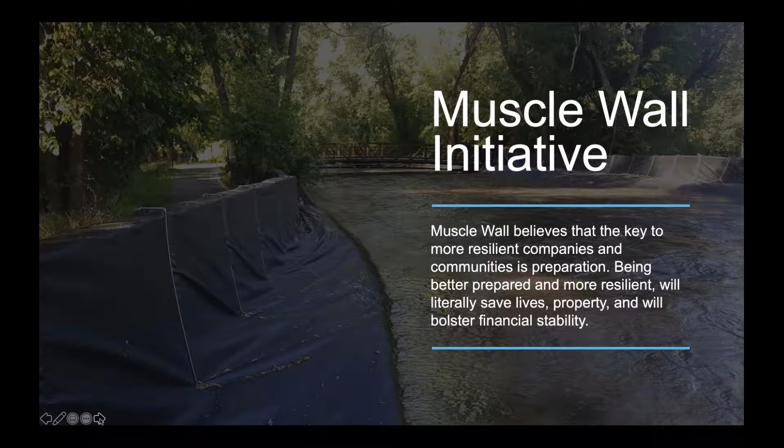FEMA has stated very clearly that for every $1 spent on preparation, you will save at least $6 on reparation. And so that's something that we focus on, and Muscle Wall is designed to be part of the front side of those types of risks. This is part of our initiative and part of our mission statement. I'm going to go ahead and share with you an overview video to get started.

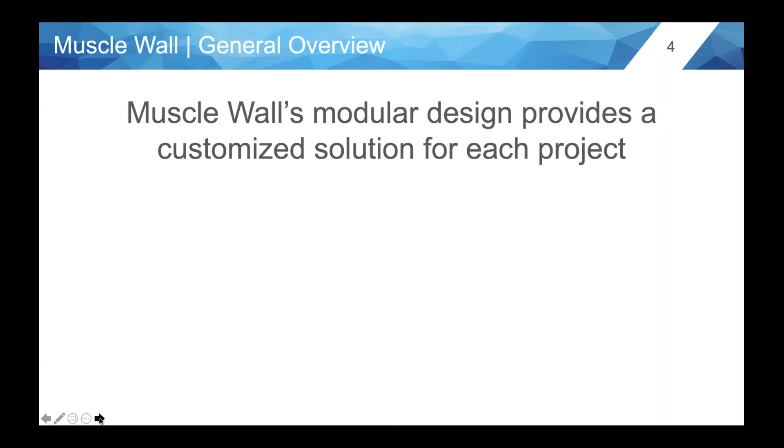It's a great video that gives us a nice snapshot of some of the many applications where the Muscle Wall system has successfully engaged different applications. This slide really well identifies the modularity of the Muscle Wall system. As you observed this slide, you could see the Muscle Wall sliding into place, identifying one of the components of the Muscle Wall system, which is a sliding joint.

That sliding joint allows the Muscle Wall to jump over obstructions and deal with different types of rolling and undulating terrain. What you actually won't notice at the joint is there's some flexibility at the joint. There's a 22-degree flex of the joint, which allows for all types of meandering around obstructions and dealing with different dynamics in different applications.

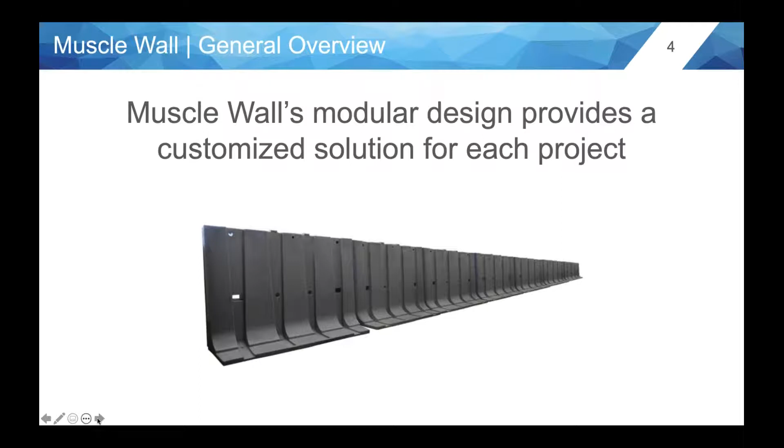down towards the toe. What you don't see in this slide is that we would use some type of a covering, depending on the application. If it's a flood protection or flood management scenario, we would use some type of an impermeable membrane or liner. If we're dealing with a stormwater application, we'll generally use some type of a geotextile.

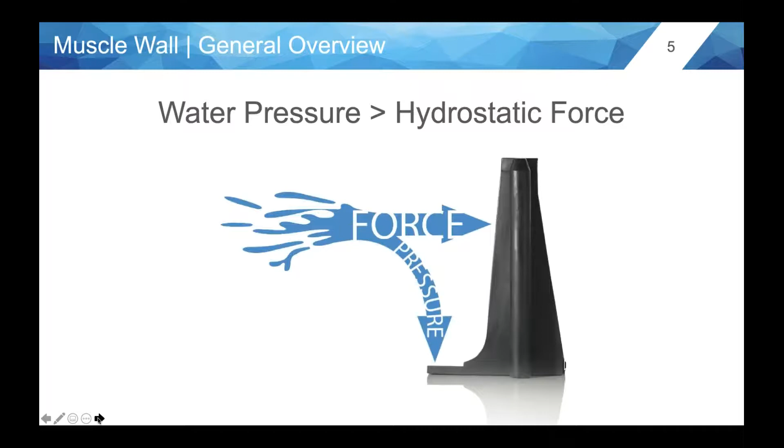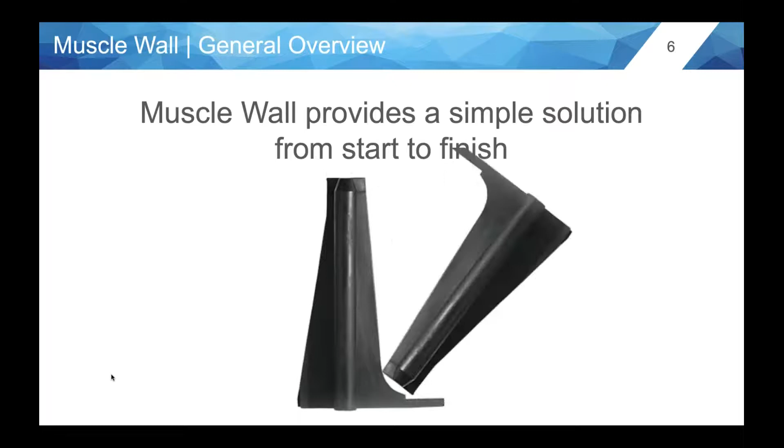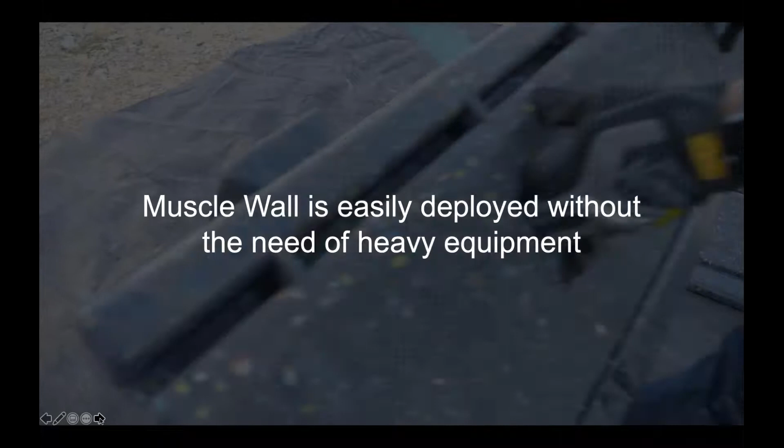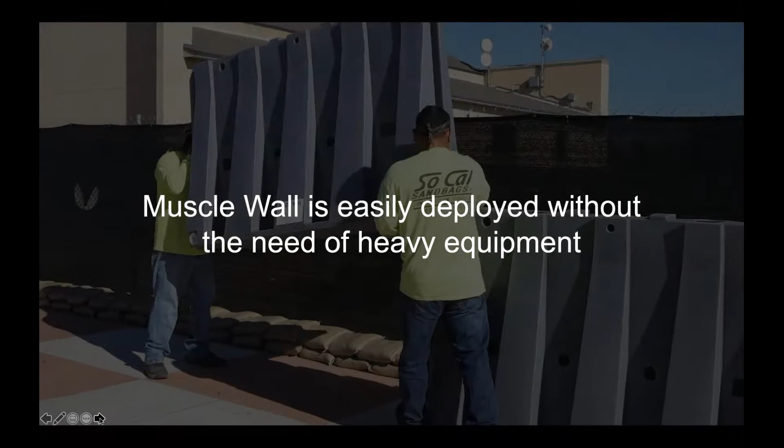We recognized early on in the design of our system, as we focused primarily in the beginning on flood protection, that as much as heavy equipment would speed up the process, we knew that all of our systems would need to be deployed by manpower alone. So all of our systems, once they're on location, can be fully and completely deployed by manpower alone.

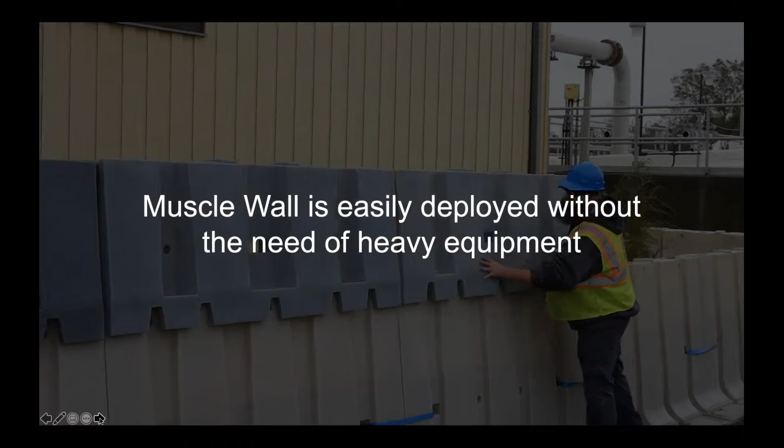This slide and video represents some of our very early testing that we did in the very beginning and the inception of Muscle Wall. These tests were done at and in conjunction with the Utah State University Water Lab, which is an Army Corps approved water lab.

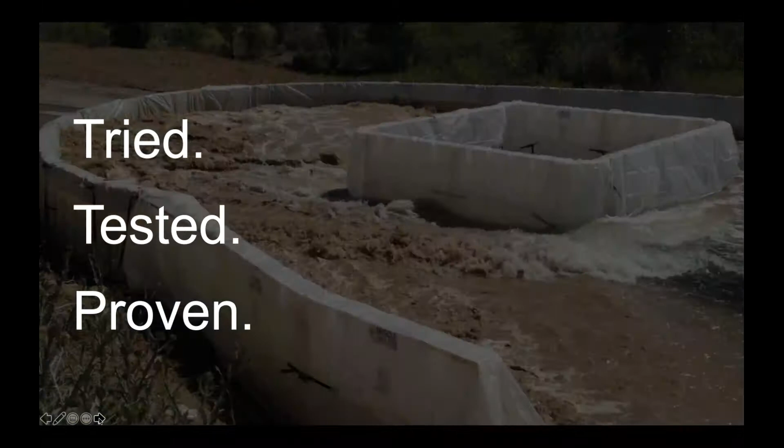We've also been tested and proven in real world applications, and recently went through the industry standard for flood protection test, which is done with the Army Corps, FM Approval, and ASFPM. And this video that I'll be showing now is footage from the completion and the success of that recent test.

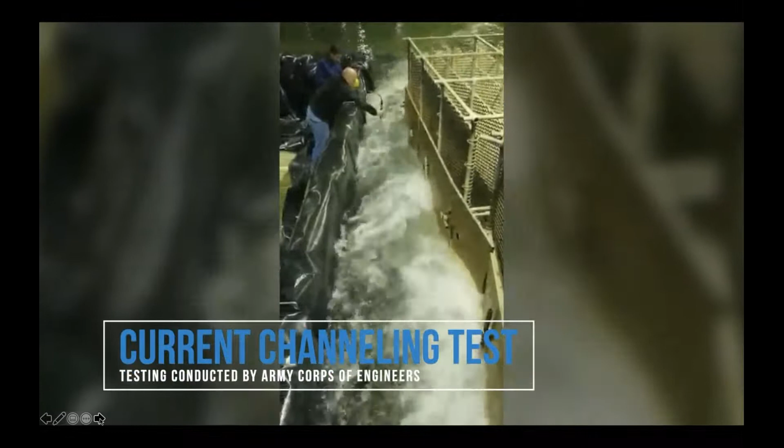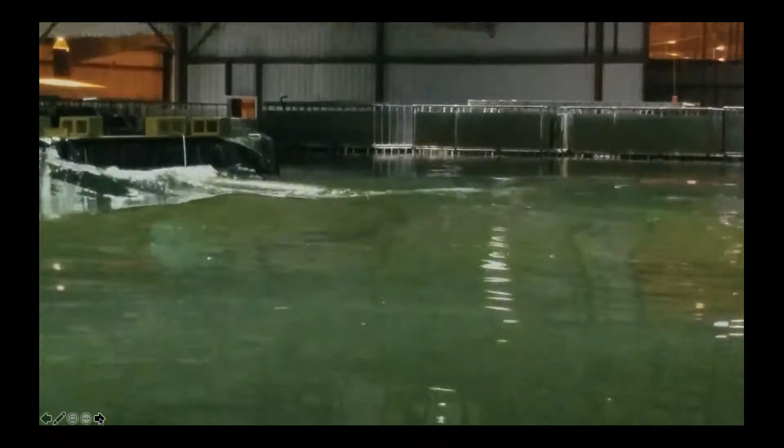We take a great deal of pride in the results of that test that we recently completed, even though we have done these tests over the years to continually test the abilities and the success of the system. That certainly was a big deal for us, so we take a great deal of pride in that.

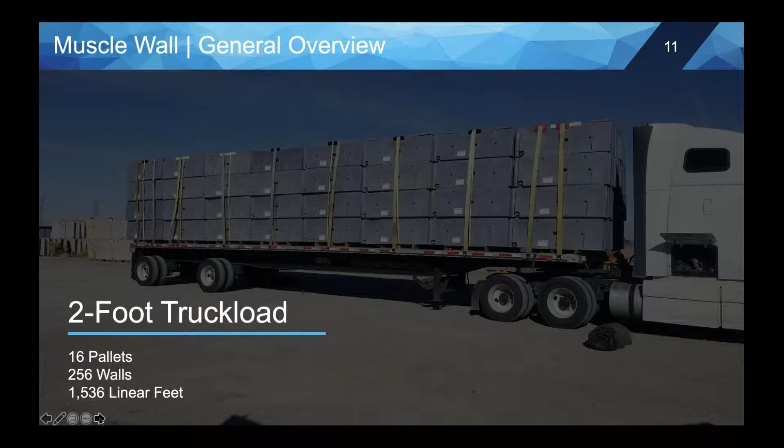There's always going to be some type of a conversation at some point about logistics, transportation, cost, and so forth. And so the next several slides, I'm going to show you some pictures of the Muscle Wall on full loads of transportation. This is a full load of our 2-foot product. That's 1,536 linear feet or 256 units. That's going to be about $50 per linear foot, or just over $80,000.

This is our 3-foot Muscle Wall truckload, 192 walls, 1,152 linear feet, around $75 per linear foot. It's going to be just north of about $85,000. And then this is a full truckload of our 4-foot product, 576 linear feet, about $100 per linear foot, or just over $60,000. Keep in mind, these are full truckloads.

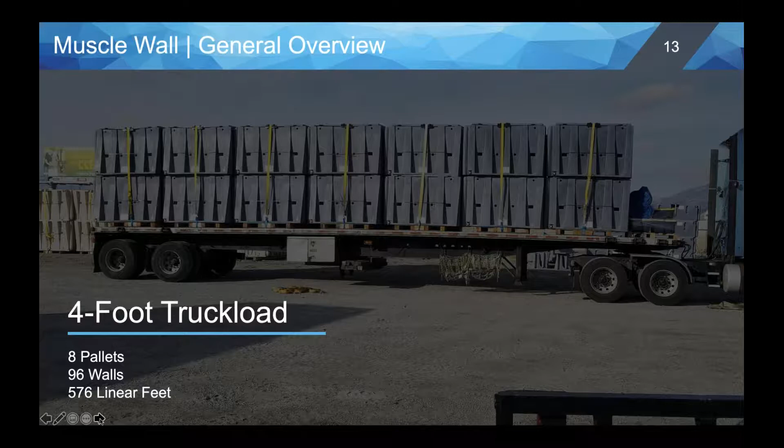Obviously, with different applications and needs for customers, we would design truckloads or multiple truckloads to meet the individual needs of each customer and application. This just kind of gives you a snapshot of the different sizes, linear footage, cost, and so forth.

I like to share this slide for multiple reasons. This is actually an application where the customer needed some type of a washout space to protect against environmental risks. And so it definitely is something that we used in a live application. It also exemplifies some of the other components and important design pieces of the Muscle Wall systems.

These are multiple systems being connected, and not only in this particular application, but we've had other applications where we needed to utilize different heights of Muscle Wall to successfully engage the dynamics of an application. So what you see here in the front is our 6-inch drive over, which allows for equipment and vehicles to drive into this space. Then you see the 2, the 3, the 4, and the 6-foot Muscle Wall, all interconnected.

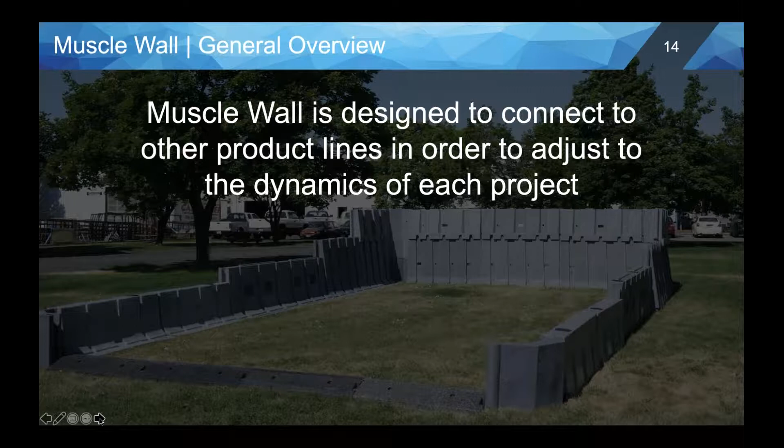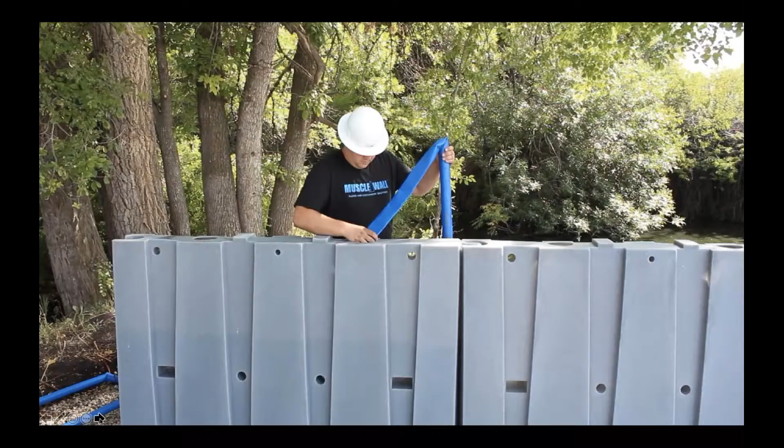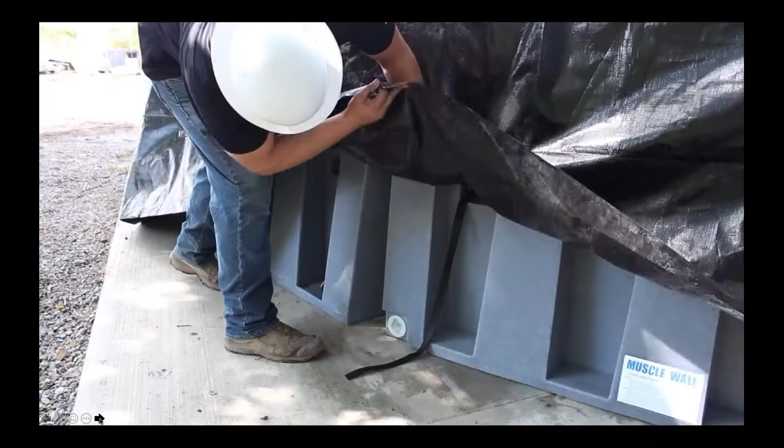With the 4-foot Muscle Wall, 2 straps are going to be used, one through the middle of the wall and one at the top. At this time, only secure the middle strap on the 4-foot wall. The liner is then deployed over the Muscle Wall system. On the back side of the system, cut a small horizontal slit in the liner. Pull the non-ratcheted strap through the slits and then tightly secure them down.

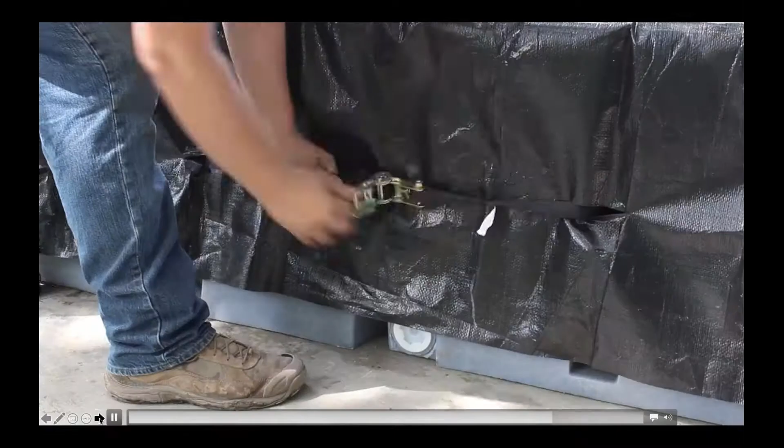As you can see from that video, Muscle Wall is a very simple system to deploy. There's a couple of components in that video that are important to note. Obviously the liner is important. Depending on the type of application, we would use a different type of liner to deal with the dynamics and the risks of each application.

Also, the 2, 3, and 4-foot Muscle Walls are hollow, so we do fill them with water. And those are some important things to consider and to certainly be aware of. We're going to jump into some of the very specific applications that we have engaged successfully and focus on. The 3 areas that we'll be focusing on primarily for the rest of the presentation are going to be flood control, containment, and then stormwater erosion control. So this next video focuses on the flood protection projects, the flood control projects that we've worked on.

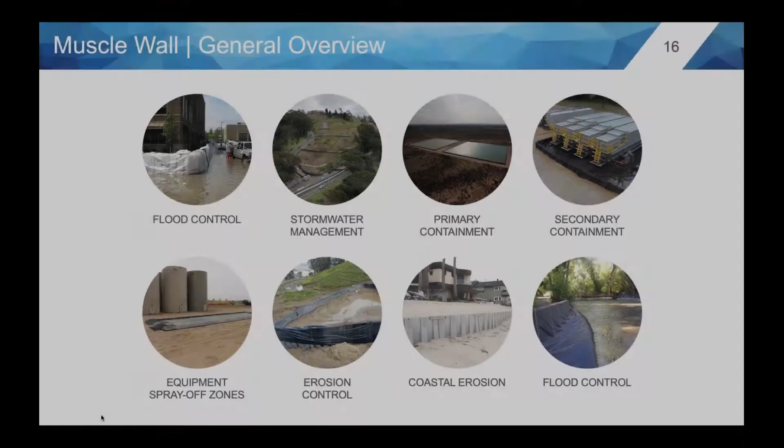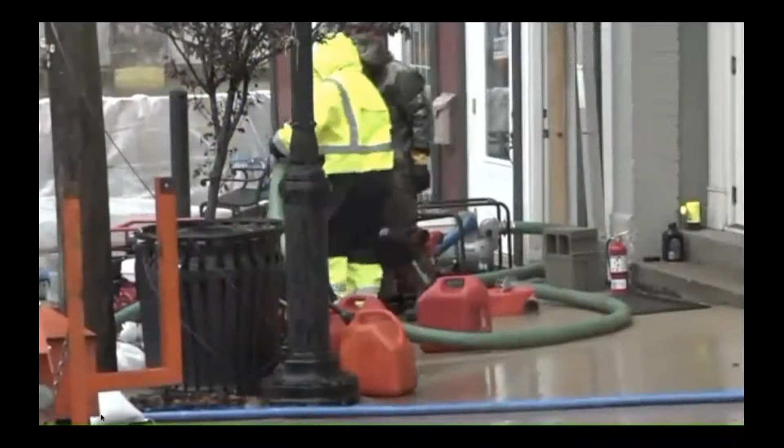Alton is used to dealing with floodwaters, but this year the mayor tells me they're implementing a new system to try to help protect the town. Now the mayor says it's really being put to the test since they didn't expect waters to crest quite so high. What started off as maybe a moderate to a minor flood, we are now in a major flood category with a crest in the city of Alton of 35 feet. Mayor Brant Walker says that's 16 feet higher than normal, putting a lot of pressure on the new Muscle Wall. Mayor Walker says it also takes less time to set up and less manpower to maintain, ultimately costing less tax dollars while still protecting the downtown.

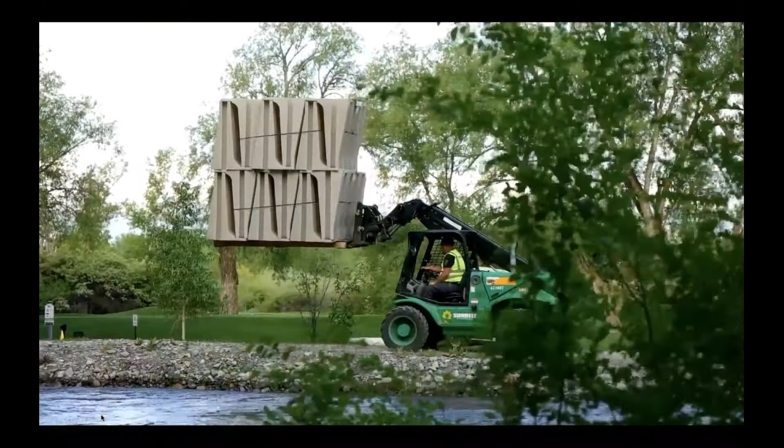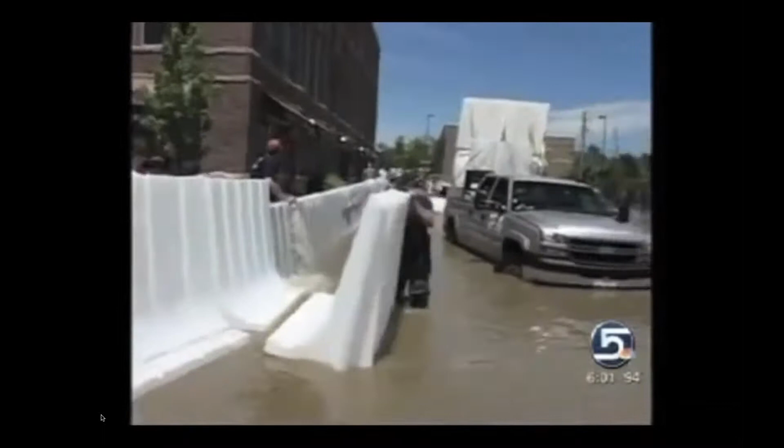Floodwaters puddled out onto State Street. A 3-story building was right in the middle of it. Sandbaggers fighting a losing battle with floodwater. We were right there on the edge. I mean, it was inches from entering the first floor. To the rescue, Muscle Wall. Their invention can be floated into place, filled with water, and sunk. The barrier quickly surrounded the building and eliminated the need for thousands of sandbags. The whole wall was built within 2 hours. If it weren't for Muscle Wall, there's no way we would have saved the building.

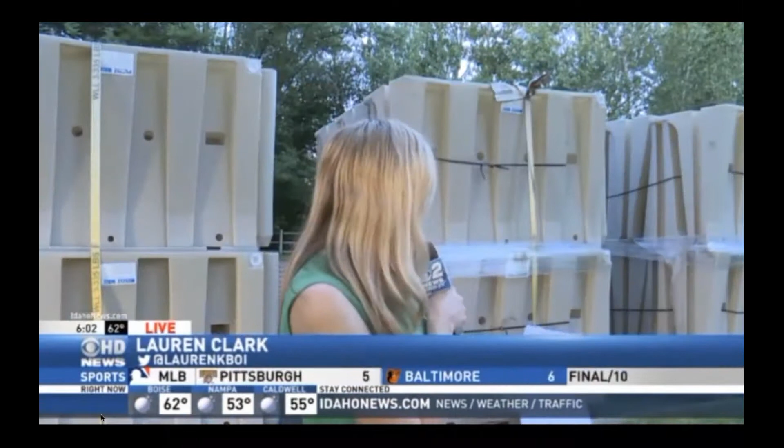This morning, Julia Davis Drive is closed. That's in preparation for a wall to be built around the zoo. KBOI 2's Lauren Clark tells us why zoo staffers are now seriously concerned about flooding and why the city chose a wall over other options. Kelsey and Brian, you guys can notice these materials here behind me used to build that Muscle Wall. If the zoo does have to evacuate those 200 plus animals, they would only have about 24 hours to make all of them move. And that is a logistical nightmare.

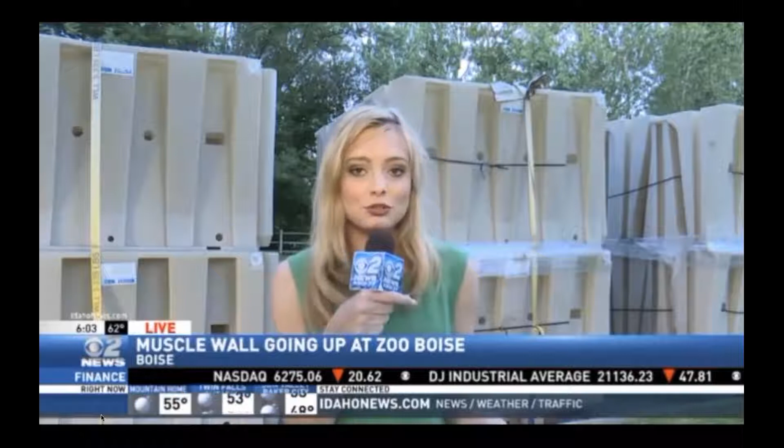Moving 200 animals would not only be costly, potentially more than $500,000, it would also be difficult. The animals could be stressed during the move. That's why the city says a Muscle Wall is a very worthwhile investment. I think it would be a more prudent, reasonable task to just go ahead and put in the Muscle Wall system now and hope that it's actually for nothing. This wall will only take about 1 to 2 days to be completed, but it will stay until flooding is no longer an issue.

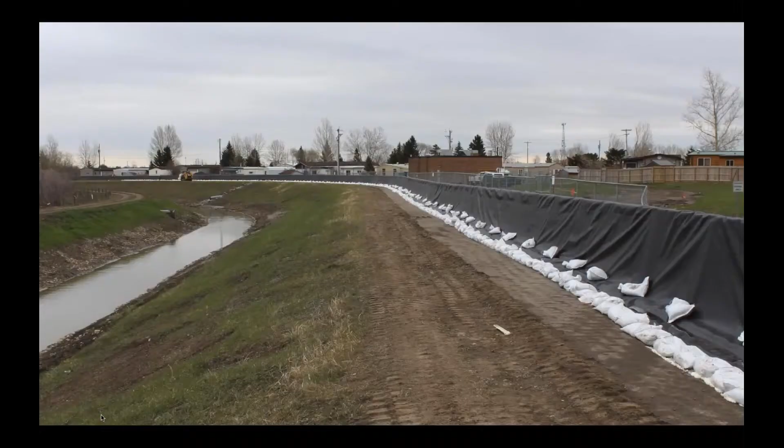That video does a very nice job at focusing on a lot of diverse scenarios, but primarily really well defining critical infrastructure. So as you could tell in the video, you saw utility substations, you saw different communities, and in one case we showed the zoo, actually in Boise, Idaho. And I always kind of get a little bit of a chuckle out of this. One of our customers in Canada focused on protecting the hockey rink versus the city hall. So the hockey rink was more important. So ultimately, critical infrastructure can be defined in so many different ways. But I think the most important thing is whatever that might be, we have successfully engaged those important issues and risks.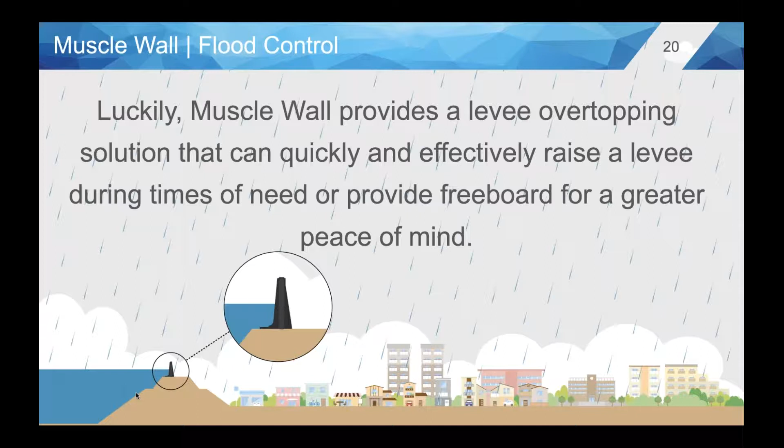So ultimately, what we're talking about here is temporary flood protection. Sandbags, on their very, very best day, are a temporary flood protection. So as a comparison, this is also in conjunction with the video that we saw just a moment ago, where the gentleman said if it wasn't for Muscle Wall, we would have lost the building. That particular building had 600 linear feet of protection need. They needed 4-foot high protection, and so we engaged the 4-foot Muscle Wall in that particular application.

If they were going to successfully engage this 4-foot high sandbag wall, it would have taken them 2 to 3 days to effectively do that, and well over 100 laborers to do that. We were able to successfully engage the Muscle Wall, 600 linear feet of the 4-foot Muscle Wall, with 8 individuals in less than 2 hours. And just as the individual explained, if it wasn't for Muscle Wall, they would have lost the building.

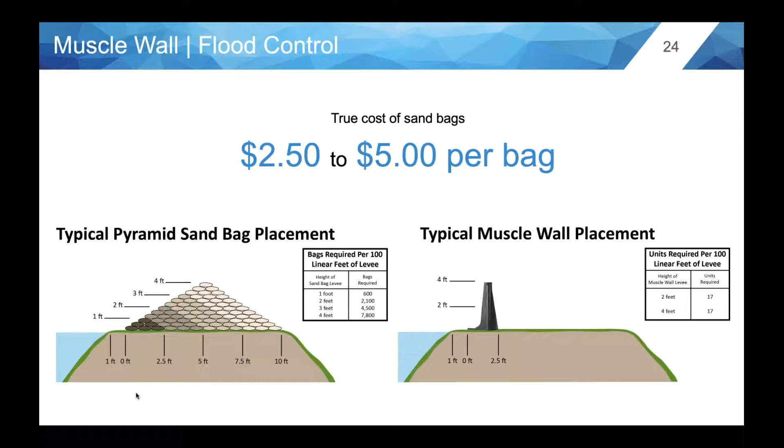So if we toggle back and look at the costs, the true cost of sandbags with all the things included, logistics, transportation, all those important individual components, and depending on the labor expense, you could be between $2.50 and $5 per bag. The Muscle Wall is only going to be about $1.25 to $1.30 equivalent per bag, and most importantly, we're reusable, more sustainable, more resilient, and ultimately, in the short and in the long term, will save you a significant amount of money.

As I've noted a few times, we use some type of a covering depending on the application. Obviously, we're focusing on flood in this area, so we're going to use some type of a liner or membrane. I won't go into great detail about each of these particular pictures, but please note that we're dealing with different surfaces, either soil, concrete, or asphalt, or a combination of those, and we have and can successfully deploy the liner or membrane to reduce and or eliminate any level of seepage.

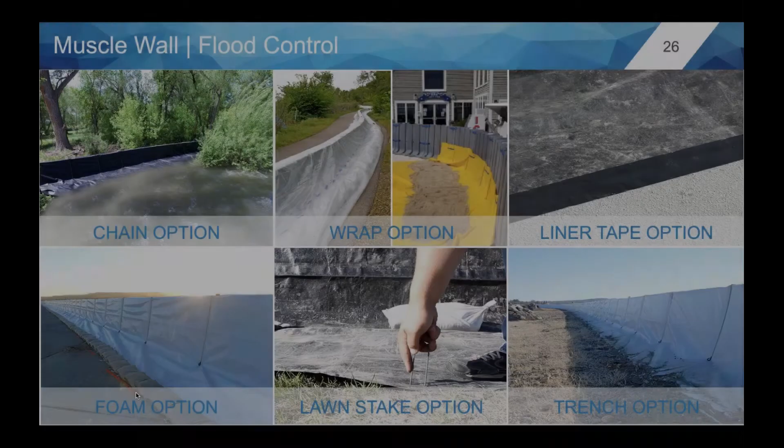For years now, the method of choice for secondary containment has been earthen solutions. These solutions are expensive, require the use of heavy equipment, and present significant environmental concerns. Muscle Wall was engineered and designed to provide superior secondary containment without the common issues that are prevalent with earthen solutions. The beauty of Muscle Wall lies within its sections.

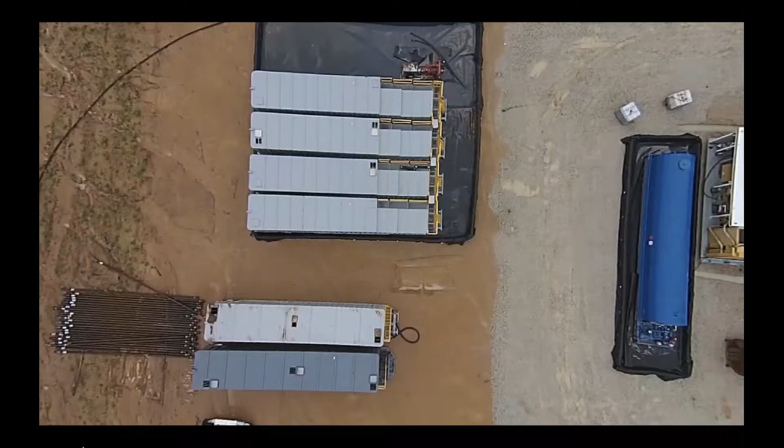By having multiple 6-foot wide sections, it can be configured to meet the needs of our customers. The corner units allow for a 90-degree turn and the ability for square containments. The 22-degree range of motion at the joints allows for circular or curved containments, as well as the ability to bend or curve around terrain or equipment.

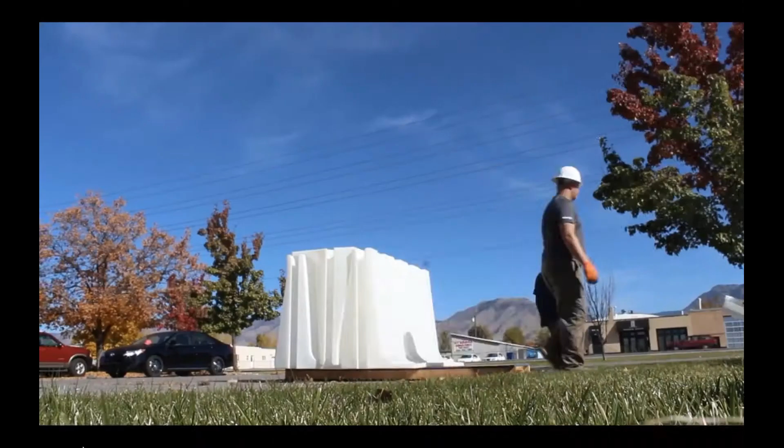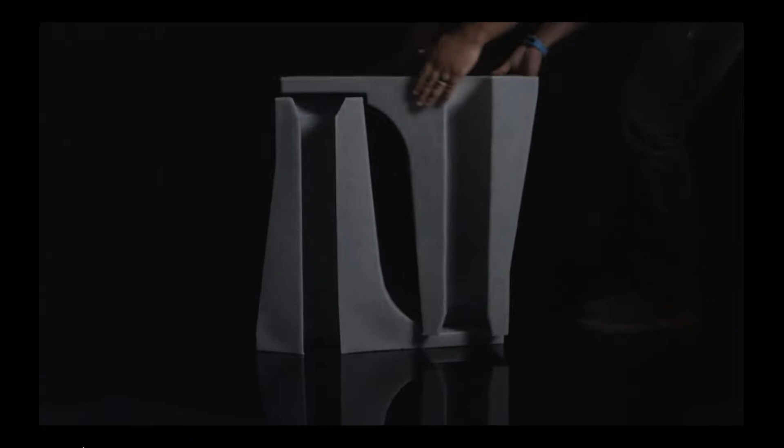While designing Muscle Wall, one of our biggest goals was to create a product that can be quickly deployed. Time is money for our clients, so we want to be able to provide them with the most reliable product on the market that can be set up and taken down in as little time as possible. The light weight of each wall, coupled with the intuitive design, allows Muscle Wall to be deployed and taken down with just a small team of workers and without the aid of heavy equipment.

A 2-foot secondary containment big enough to house a standard frac tank can be set up in less than 30 minutes. Muscle Wall was designed with the environment in mind. By using Muscle Wall as a secondary containment, negative impacts to the environment, such as erosion, are greatly reduced. At Muscle Wall, it is our desire to help our clients be responsible and exceed all standards and environmental regulations.

So obviously we're talking about Muscle Wall as we have engaged successfully the containment space. Most of our experience in containment has been directly connected with the oil and gas industry. We also have worked in different industries like agriculture. But we'll focus today a little bit on most of the applications that we've dealt with over the years. We've now worked in the oil and gas industry for close to 11 years.

Preceding Muscle Wall's engagement in the oil and gas industry, the industry primarily engaged earthen type solutions, very archaic, very costly, and ultimately costly inefficiencies as well. One of the challenges in the industry is the reliability of the frac tank systems. They generally are very unreliable. And so when they were using the older solutions, the earthen solutions, it would take several days to demobilize a frac tank that was now not functioning.

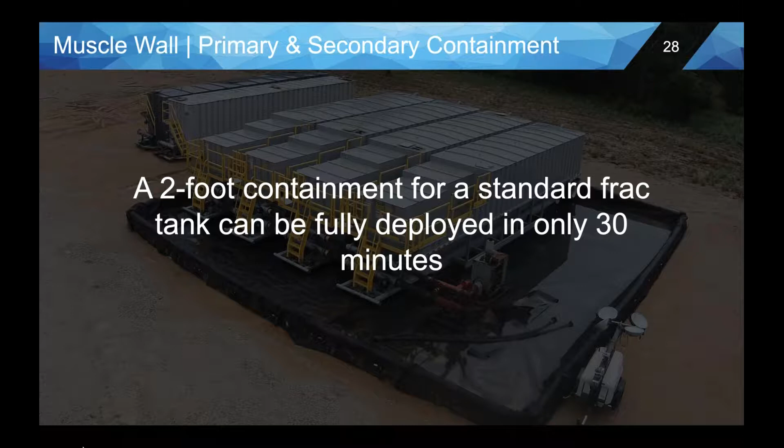And with the introduction of the Muscle Wall system, that changed significantly and also changed some of the costs that they were incurring because of the inefficiencies. Some of the things that are important to note, not only from a secondary perspective, but we also have done quite a bit of work in the primary containment space in the oil and gas industry. And I just want you to focus on some of the key pieces here, just overall efficiencies.

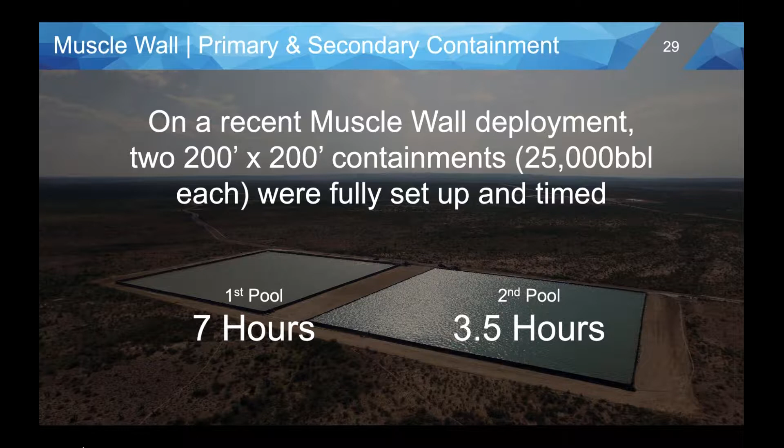So the more they use the system, here you see the first system was set up in 7 hours. This is a 200 by 200, 4-foot high containment system, 25,000 barrels of fluid. The very next time, and these are individuals that have never used the system before, literally cutting it in half. So being very efficient in time, cost, all those types of things. And in any type of a scenario, if you can save money, save time, it's always worth considering.

This is our 6-inch drive-over system that you're seeing here. We designed the system several years ago, initially at the request of the oil and gas industry, primarily because of the systems that were being used at the time and continue to be utilized. There are foam type solutions. The challenge with foam solutions is that it does provide a level of containment, but once the vehicle actually drives into the containment and depresses the foam, you actually lose the continuity of that containment.

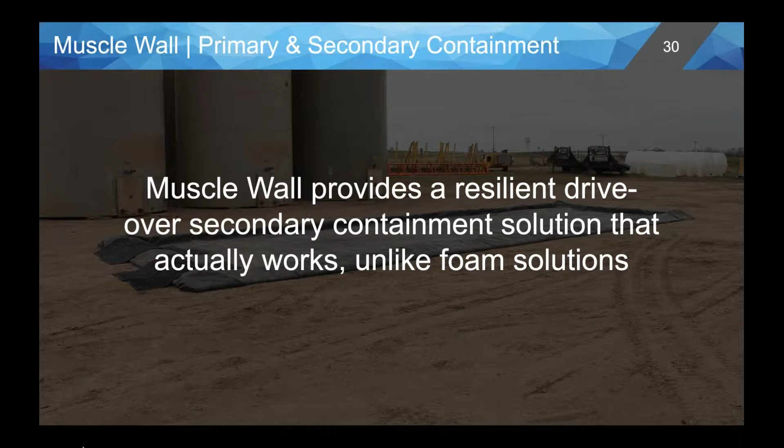So our system was designed as a hardened system. It still allows people to drive in with their vehicles or equipment, but you always can maintain full containment continuity, regardless of whether the product is inside or driving into the containment area.

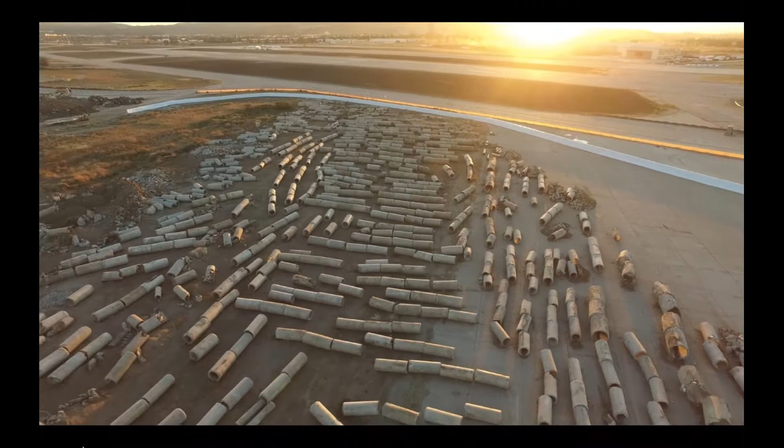Shifting gears here a little bit to focus on Muscle Wall and the application of stormwater management. That's one of my favorite videos for a lot of different reasons. I use it quite a bit with training with customers, but it does a lot of great things. It shows efficient, effective deployment of the liner on multiple surfaces. You see the introduction of the liner clip and just dealing with lots of different scenarios.

So all the footage of this video, including this picture here, was done on a project that we did in conjunction with Lennar. Lennar is, I believe, currently the third largest developer in the United States, and we've done some pretty substantial projects with them. But ultimately, what was going on here and throughout the project is that they were running a great deal of risk dealing with traditional BMPs, silt fence, straw wattles, and hay bales, and ultimately they were just rendered ineffective.

Stormwater basins, detention spaces were being inundated. It was creating stormwater violations because of discharge. There were flooding events because of inundation in detention spaces. And so with the introduction of the Muscle Wall system, we were able to successfully engage Lennar and their development partners in mitigating those risks and providing just a better BMP to get the job done.

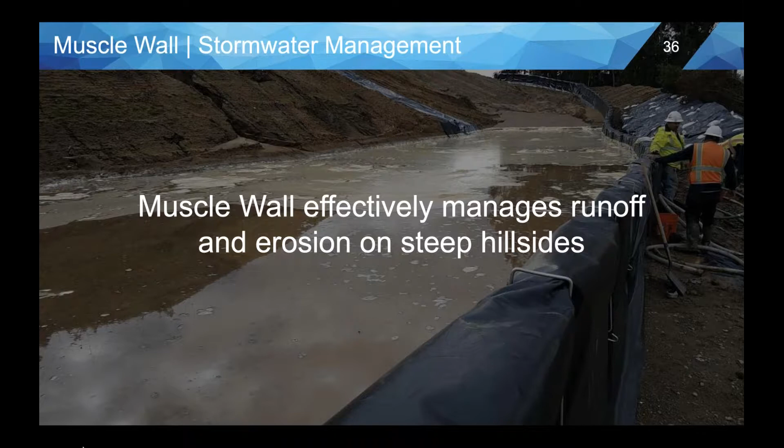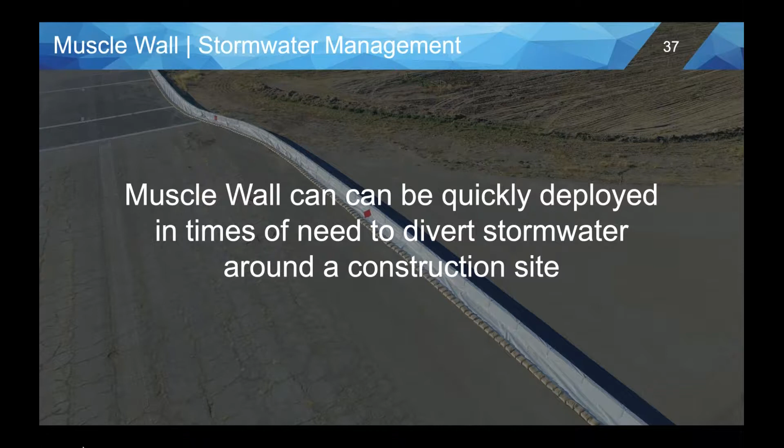And so Muscle came in and did a variety of things on this project, and I'll show some additional ones here in just a moment. But ultimately, we were very effective in managing some of the erosion and stormwater discharge runoff risk in this particular project. We also have done a lot of diversion work in stormwater management. This is another snapshot from the El Toro project with Lennar in Southern California that was part of the initial video.

We've also done work in hazardous materials containment and control. This particular customer was looking down the barrel of about a $1 million plus fine from the EPA. The EPA did give them some time to respond effectively. We were able to support them in less than 24 hours. And ultimately, the end result was containment of the hazardous materials and full elimination of the EPA fine.

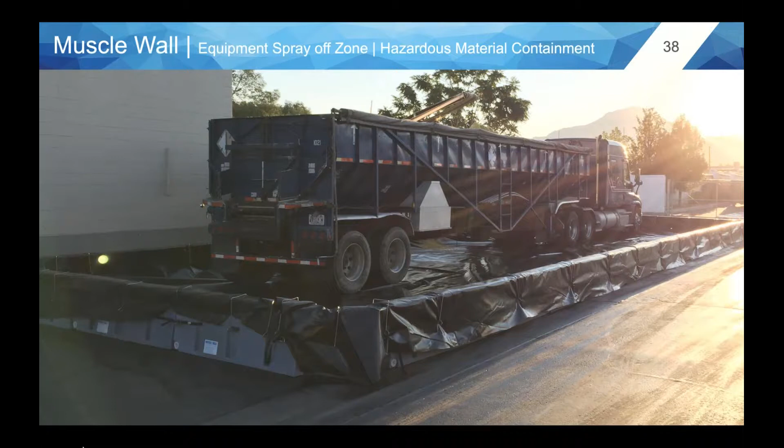About 4 years ago or more, that particular golf course was heavily inundated with floodwaters, virtually destroying most of that golf course and eliminating the revenue. That golf course provides at least $3 million annually to this municipality, which is very significant to the success of that municipality. And so, as was noted in the original flood video, critical infrastructure means a lot of different things to different people, communities, municipalities and the federal government.

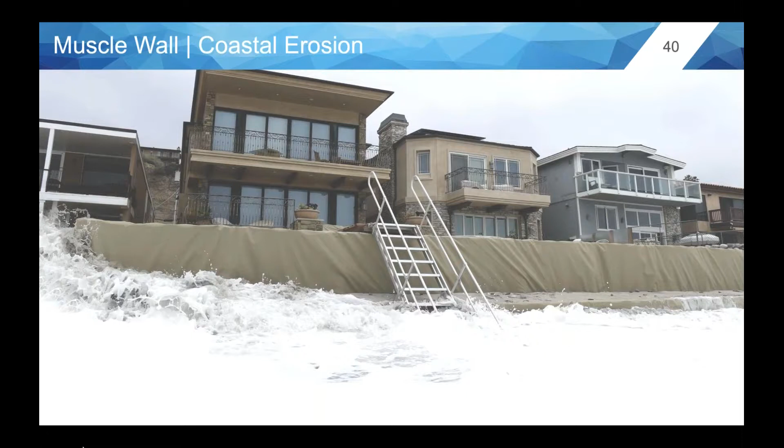We've also done some work in the coastal erosion and coastal protection space. This particular picture is actually 4 years old. The Muscle Wall is still being utilized in this space for coastal erosion. Previous to this picture, this coastal space had dealt with well over 60% loss. And in many situations, these coastal properties were running the grave risk of literally dropping into the ocean. And so Muscle Wall came in, we engineered and designed the system to effectively engage this risk. And so we've had some great success in the coastal erosion space as well.

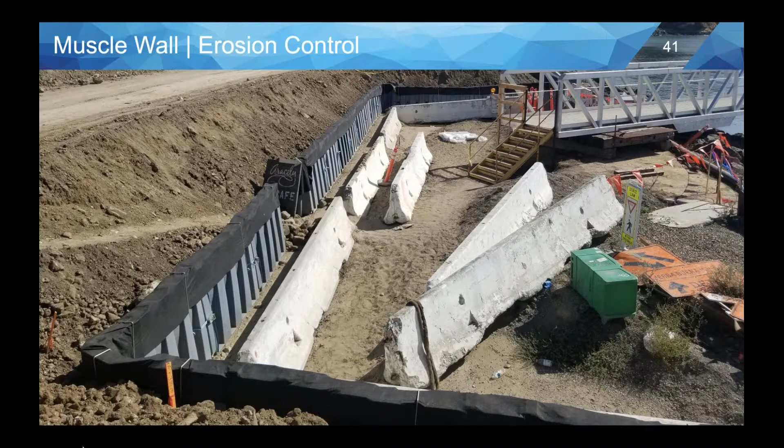A little on the top side of this picture, what you won't see is about another 1,500 linear feet of this 4-foot product. And it's literally sitting on the very edge of the bay. The only thing between the bay and the Muscle Wall is a line of riprap. But once again, it's providing that perimeter control, perimeter protection for a very important, very high profile project. This is also from that same project with Lennar in the Bay Area, providing some sediment capture to once again reduce and or eliminate the discharge risk into the bay.